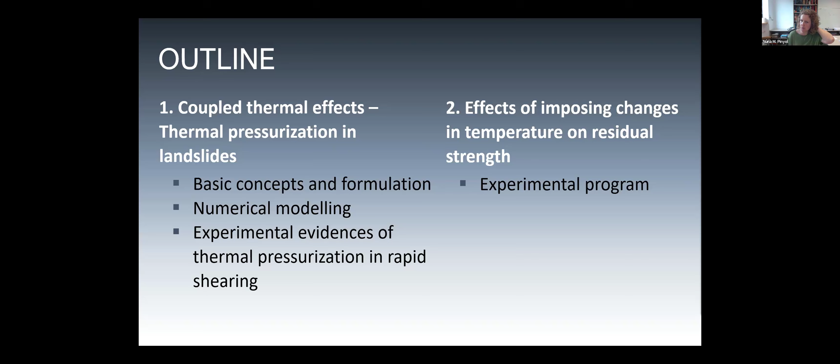Later we focus on the second part of my presentation, in which we try to analyze if we can isolate the direct effect of imposing changes in temperature on the residual strength, because at the end it is this strength that controls the evolution and the acceleration or runout of landslides. This part we explore mainly from an experimental point of view.

Then we move into the first part to understand thermal pressurization. This phenomenon was invoked to explain the catastrophic acceleration of some landslides, in particular the Vajont landslide that you know for sure, that occurred in Italy in 1963.

It is one of the most catastrophic landslide events of the 20th century, because 270 million cubic meters of rock were mobilized at speeds exceeding 25 meters per second, which is more than 100 kilometers per hour. This mass impacted the reservoir and the wave overtopped the Vajont Dam and destroyed the village located downstream in the main valley.

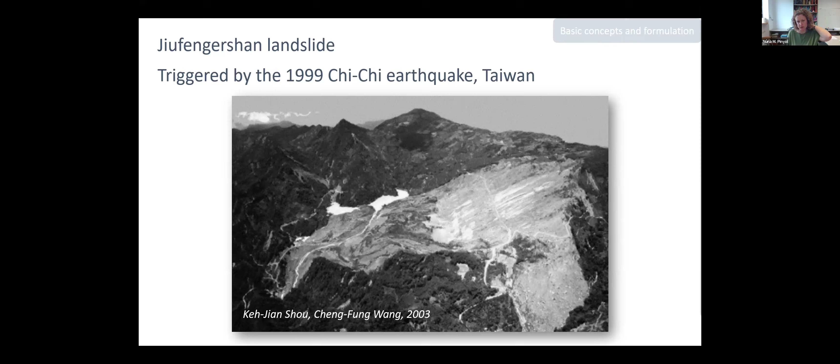The concept of thermal pressurization is also invoked to explain more recent landslides. An example is the landslide that occurred in Taiwan, triggered by the Chi-Chi earthquake in 1999. This is the Jiufengershan landslide, and its runout is explained, or justified by some authors, because of thermal interaction again. Other catastrophic landslides thought to have large runout due to this cause include the San Juan de Grijalva landslide, triggered by a drawdown in 2007 in Mexico, where thermal interaction may have also played an important role.

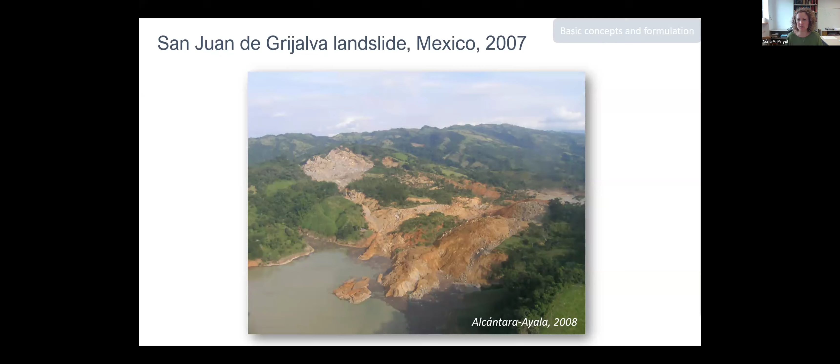The fundamental concept and physical phenomenon behind thermal pressurization is that the heat generated due to frictional work induces increments of pore water pressure, which in turn reduce the effective stress and then the available strength.

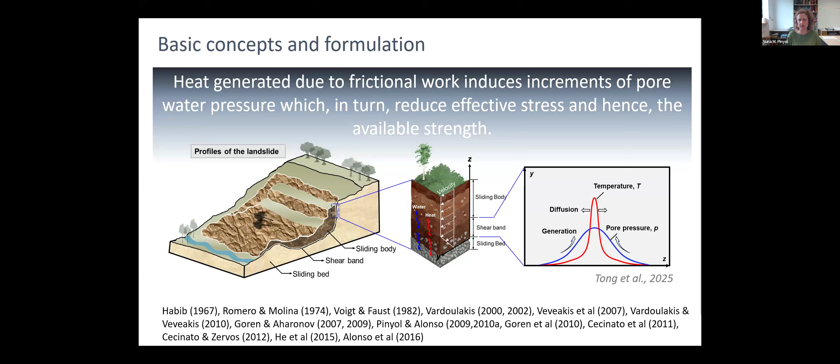These ideas have been developed by several authors since Habib in 1967 and others, and the concepts and formulations are not equal for all authors. Some hypotheses change, but the idea is always the same: that the temperature induced by this frictional work causes a loss of effective and available strength. Then the governing equation of this phenomenon that we implemented is described here.

The idea is that this frictional work is defined, which dissipates as heat at shear bands during motion. The frictional work is made equal to the heat according to the first law of thermodynamics, and this heat eventually induces an increment of temperature due to the energy balance equation. Then this temperature may induce excess pore water pressures due to the constraints of expansion and flow.

It is defined by means of the mass balance, the mass of water and solid balance. This temperature may induce pore water pressure that, depending on the constitutive equations considered, induces a loss of strength. In this first part of the analysis, the constitutive equation was modeled by means of a simple Mohr Coulomb model, without including temperature in the constitutive behavior of the material. But this effect of the pore water pressure may induce changes in the mechanical response of the soil.

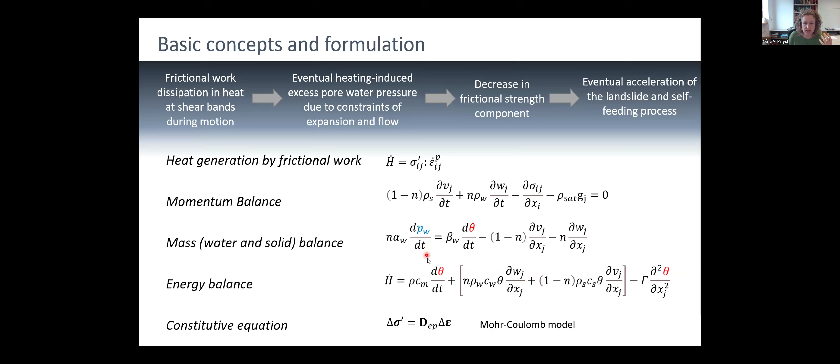All of these equations were implemented in a general numerical tool to solve boundary value problems, and we selected the material point method, which is suitable for simulating large displacement by combining Lagrangian and Eulerian discretization. The idea is that the materials are discretized into material points that carry all the information and can move throughout the domain, which is discretized with a computational mesh used to solve the equations. The results are finally mapped to the material points that update their position without involving distortion of the computational mesh.

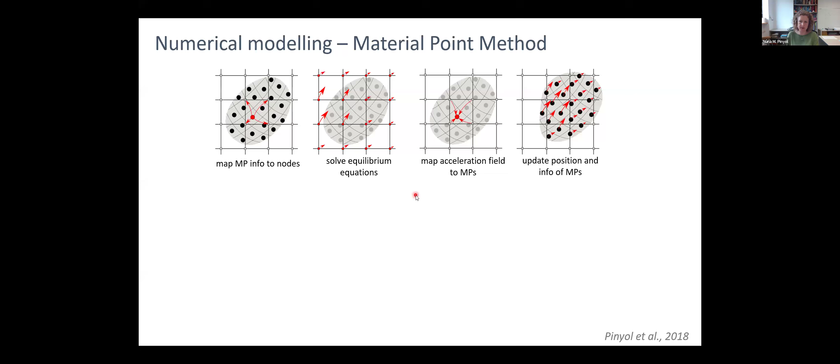With this, we could include all the equations, but what we observe is that direct implementation of the equations to the material point method leads to a pathological mesh dependence, because the rate of generated mechanical work per unit of volume depends on the shear band thickness. The thickness of the shear bands when modeling with a continuum method such as standard MPM, but also standard finite element method, depends on the mesh size.

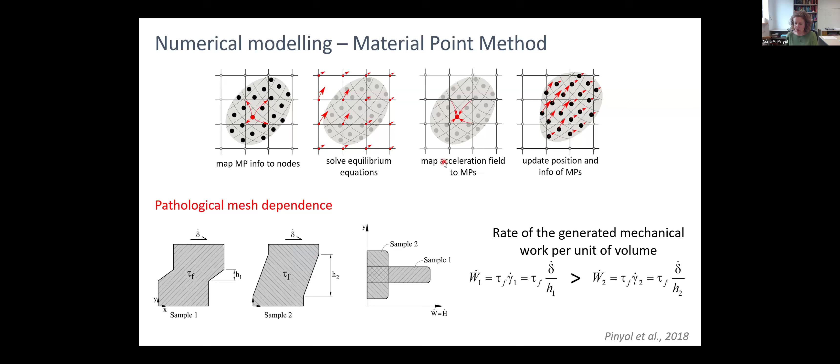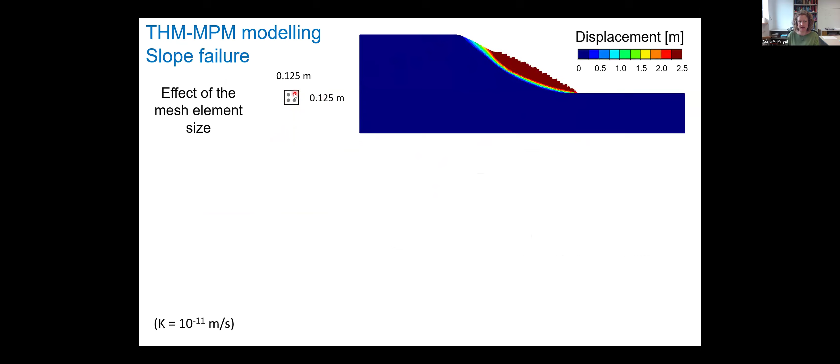What we observe is that the results, for example in this simple geometry, in terms of run-out maximum displacement, depend completely on the mesh element size. If we increase this element size, the displacement reduces significantly because the accumulated pore water pressure due to a given displacement was lower when the element size was larger.

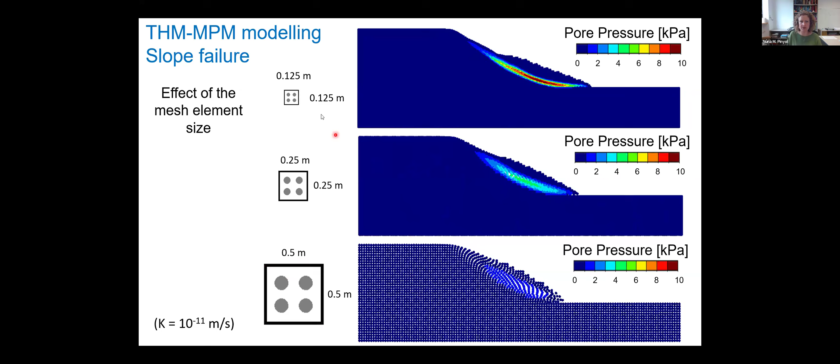As you can see here, the velocity starts, the slope becomes unstable, but given a displacement, the pore water pressure accumulated is larger, even having the same properties of the material, because the only difference is the element size.

In order to overcome such limitations, we developed a numerical solution which consisted in defining numerical embedded joints. The idea is calculating the work dissipated as heat by means of the deformation associated with a material point, but localized into a shear band whose thickness is defined by the user, and it doesn't depend on the mesh discretization.

Note that this procedure is not equivalent to non-local regularization that is typically applied in finite element method, because in this case the thickness of the embedded shear bands is smaller than the element size.

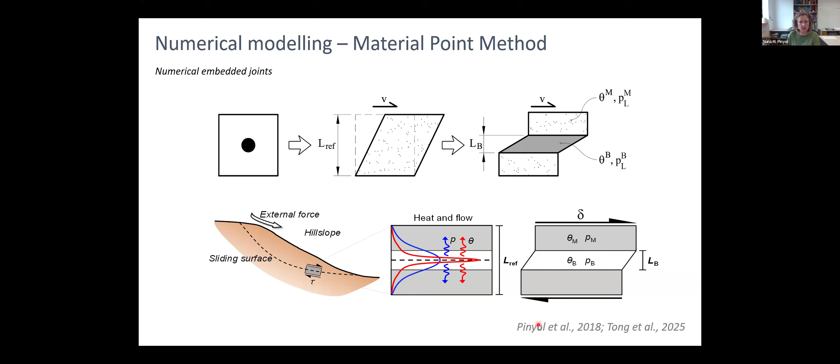Once that is defined, we define a local equilibrium to solve the dissipation of pore water pressure and temperature generated in these numerical embedded joints. Once this local equilibrium was defined, the rest of the equilibrium with the rest of the mesh is applied as usual, or as the standard methods do.

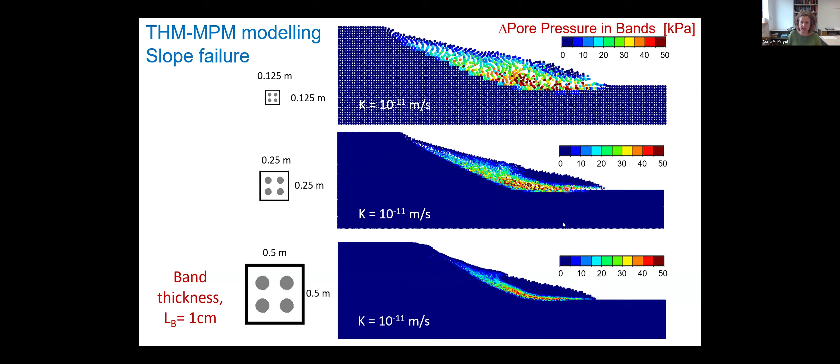With that, you can see that the incorporation of the embedded joints prevents the pathological mesh dependence of the heat generation. We observe a similar, though not pathological, effect of the mesh, and the excess pore water pressure measured is almost the same, as well as the final displacement and the final geometry calculated.

Then with that, we wanted to evaluate what are the important parameters actually controlling the response of thermal pressurization in accelerated landslides.

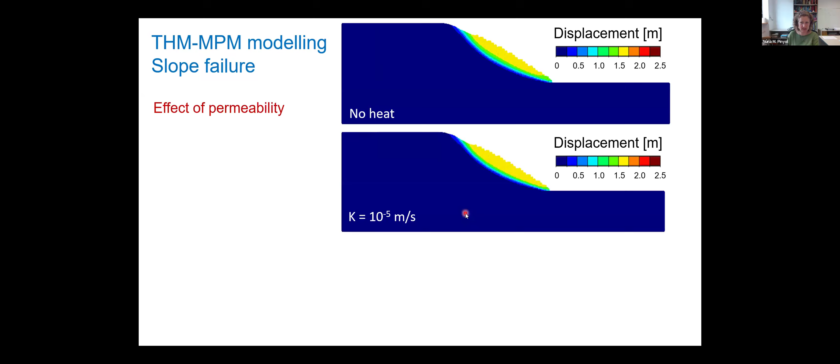We observed that the most relevant parameter is permeability, because if the slope material is relatively pervious, with a permeability equal to 10 to minus 5 meters per second, the results are similar to the ones obtained without thermal coupling, without the thermal interaction.

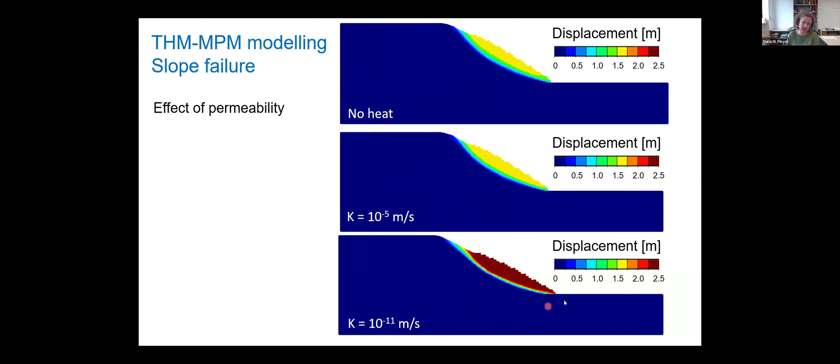On the contrary, if the permeability is significantly lower, around 10 to minus 11, the effect is relevant. This low permeability prevents the dissipation of the thermally induced pore water pressure, and it leads to acceleration and larger displacement of the landslide.

Here you can see how this low permeability prevents the dissipation of this excess pore water pressure, and it is not the case when the material is more pervious.

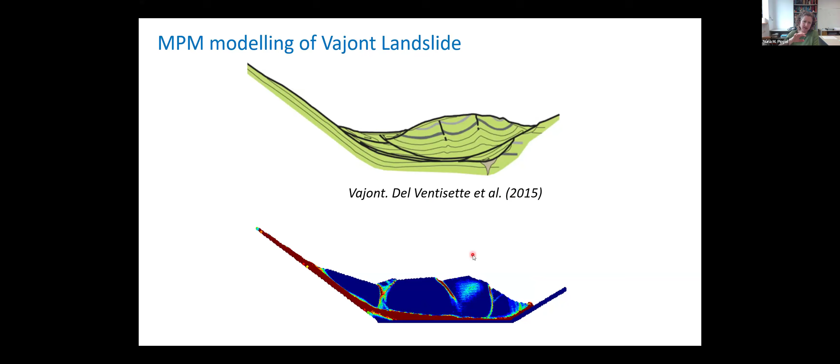With that, we could model the Vajont landslide for the first time without simplifying the geometry, using a general numerical tool, which is useful because you can define a more realistic geometry and also introduce the effect of the strength of the mobilized material during the motion.

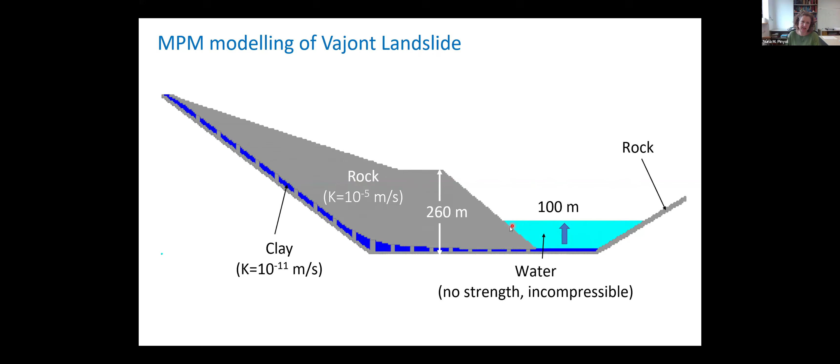We also include the water, and we simulate, not in actual time, the reservoir impoundment and how the landslide moved.

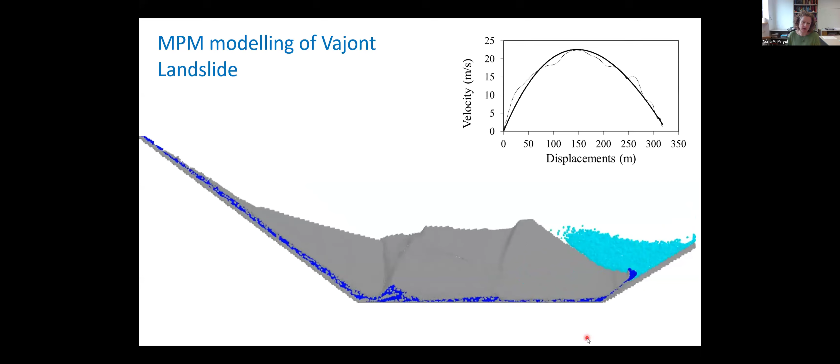Here you can see the video of this motion and acceleration, and here the shear bands defined. The results show that the landslide speeds at more than 20 meters per second and runs more than 300 meters until reaching the opposite flank, which is more or less what is estimated according to the height of the waves generated.

What we observe is that if we consider the description of the materials and characterization according to the literature, we could reproduce the sliding, but not the runout, because the displacement calculated was underestimated significantly compared to the final runout, which was more than 1 kilometer. This is the final geometry, shown in blue, of the landslide.

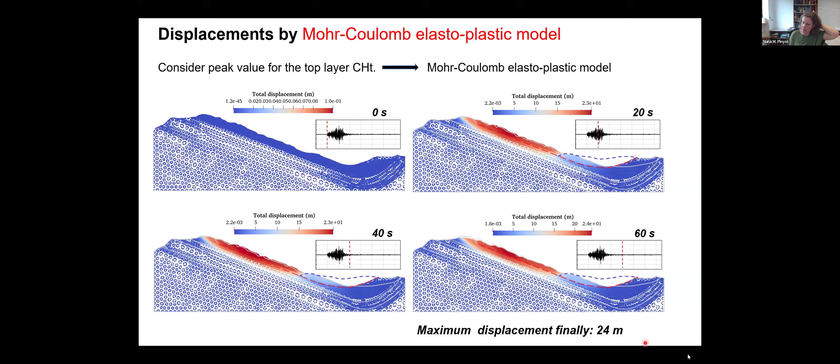Then we introduced a description of the materials with strain softening, according to the results of laboratory tests carried out on the material involved in the sliding surface. The effect is significant and the runout increases, however it remains smaller than the observed one.

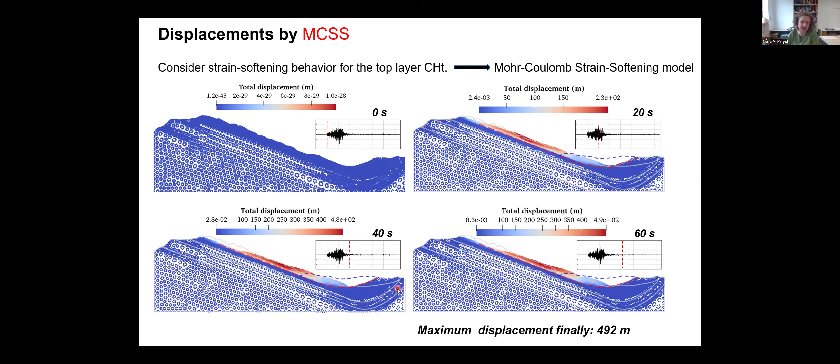Then we explored if the thermal effect could explain this large landslide. This is without thermal effects, only including the strain softening. As you can see, it is moving and the runout is larger, but it finally stopped.

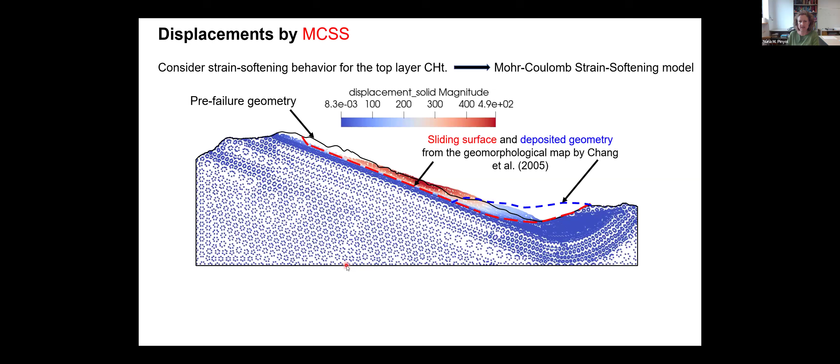When the thermal effects are included, we observe that we can model the runout, and the final geometry is more or less similar to the observed one.

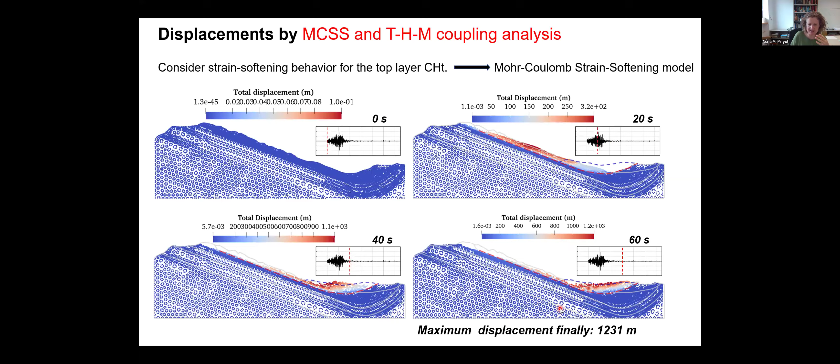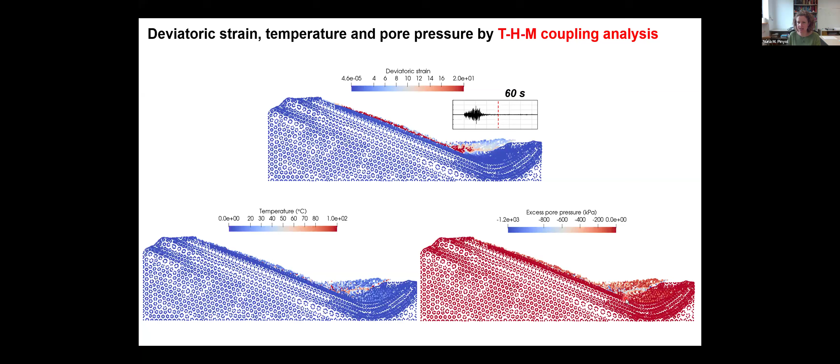This is the video of the results in the MPM, including the thermal effects and the embedded shear bands.

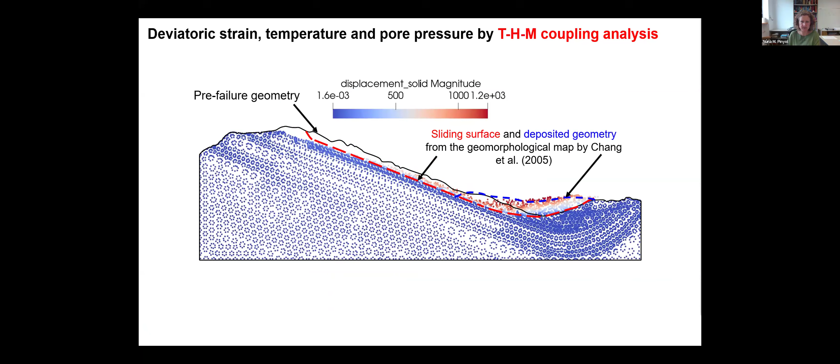At that point, we wondered, or we wanted to explore the observation—we are interested in experimental evidence regarding thermal pressurization due to shearing, because in the literature this data was very limited.

Some years ago in the laboratory at UPC, a rapid ring shear test was designed and built. This test is a ring shear test able to control and measure temperature and pore water pressure, with velocities applied in the range of 0.1 kilometers per hour to 20 kilometers per hour.

The idea was to apply a vertical stress and control the vertical displacements, measuring the pore water pressure and the temperature developed in the sample during shearing at very large velocities.

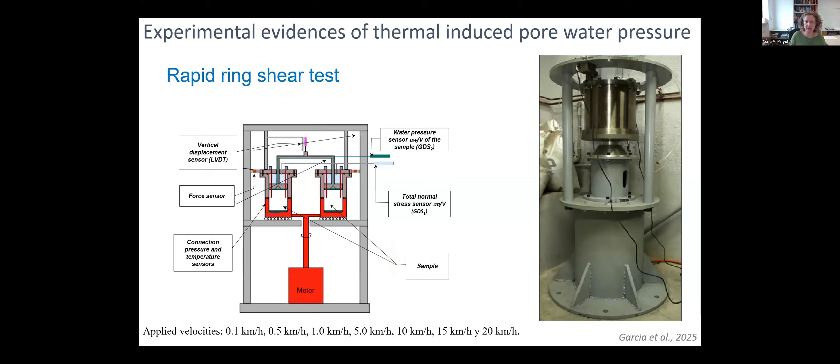Here I present some recent results very quickly. Samples of low plasticity clay were taken from an incipient landslide located on the flank of a reservoir in Catalonia, and we're analyzing these landslides because we want to assess or evaluate the potential acceleration of these landslides.

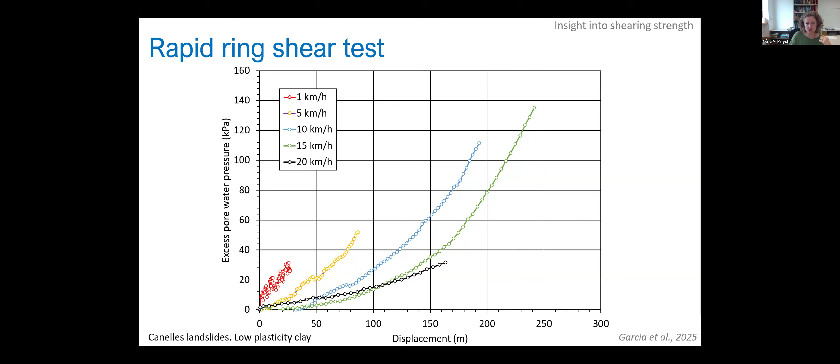This material was tested in the rapid ring shear test. We observed that during the test, as displacements accumulated at different velocities, the temperature increased significantly, and this involved an increment of pore water pressure inside the sample, which obviously controls the effective stress and the strength.

At this point, we wondered if the temperature generated by the frictional work, or maybe imposed from outside, could affect the residual strength, and also if we need a very large increment of temperature, or only a few degrees, to have an effect on this residual strength parameter that controls the displacements and evolution of landslides.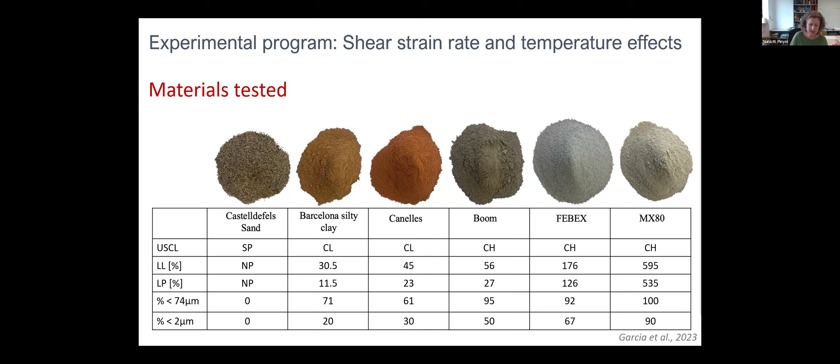We added some additional mixture samples, constituted by the Castelldefels sand and the Febex clay and the MX80 clay, which are these high plasticity clays.

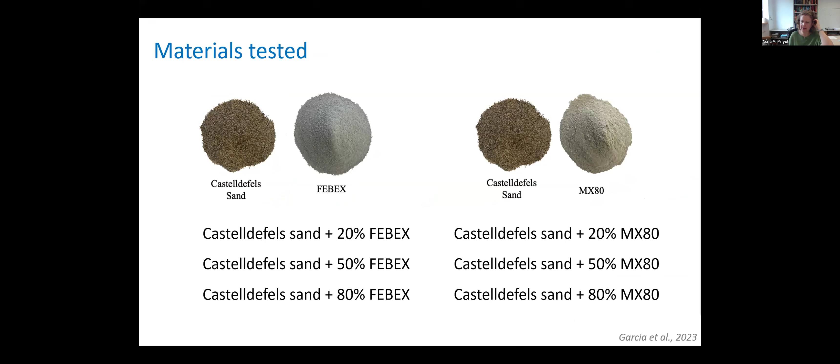We modified the Bromhead ring shear equipment in order to control the temperature, which was controlled by cooling and heating the water surrounding the cell where the sample was located.

The idea is that water circulates from this deposit and the temperature is imposed and controlled. We ensure the temperature of the system and the equipment, and that the temperature in the sample was evaluated.

The protocol of the test is shown here. We perform heating and cooling tests. Some tests were started at laboratory temperature, and some were previously cooled or heated, then we apply the change of temperature during shearing.

We ensured that transient effects were not evaluated, in the sense that we changed the temperature while shearing continued, and later on we evaluate the strength in order to assess not the transient effect of the temperature change, but the strength at this new temperature.

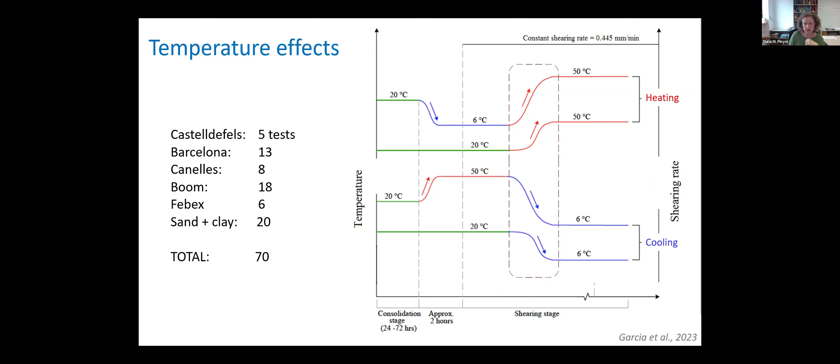In total, we performed 70 tests on the different samples described. Here I show you some results. This is the temperature applied, shown in green, and the results are shown in red.

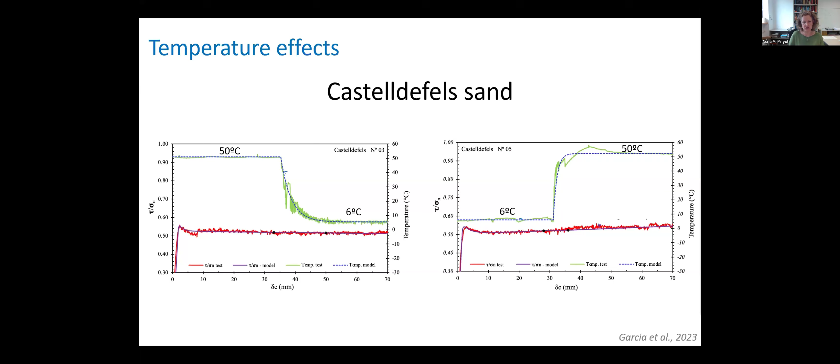In case of the Castelldefels sand, this fine sand, we didn't observe any reaction, any effect. In the low plasticity Barcelona silty clay, the effect was not evident. But this effect increased with the plasticity, with the content of clay and with the plasticity of the clay. You can see this effect in the Canelles clay.

This is the material of the landslide that I showed you previously. You can see that when the temperature of the sample decreases, the strength increases. This effect is symmetric, in the sense that when the temperature increases by the same magnitude, the strength decreases also in the same magnitude.

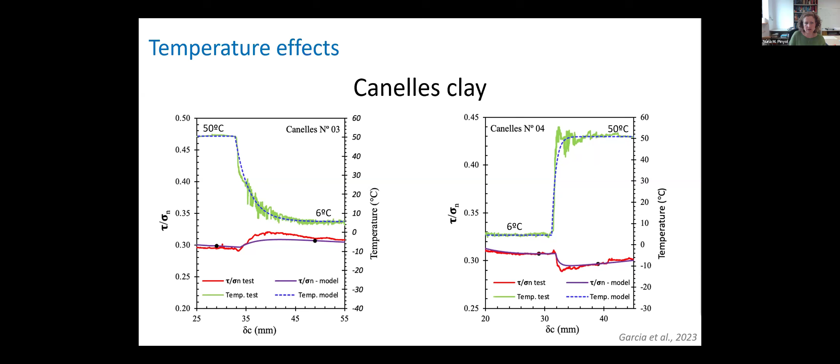It was also observed in the Boom clay and in the Febex clay. Here you can see the results in terms of variation of temperature and increase or decrease of strength, expressed as increments of friction angle.

Sometimes the results are not very clear, but the tendency we observe is that the effect clearly increases with clay content and with plasticity. In this test, the effect is not so large, but we have some problems with these samples.

Because during shearing they exhibit some expansion, we cannot interpret the results in the same way.

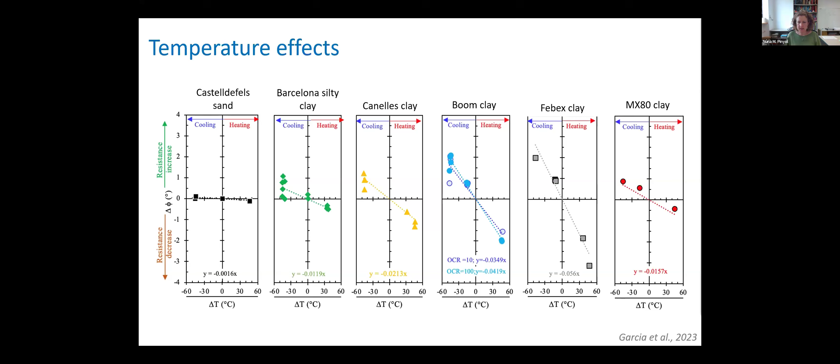Moving into the conclusions: a numerical tool has been developed to model thermal pressurization inducing acceleration on landslides, and permeability is the most relevant parameter controlling the coupled thermal effects.

We observed in rapid shear ring experiments that there are physical evidences of this excess pore water pressure generated during friction, at least at large velocities.

In parallel, a consistent experimental program to evaluate the effect of imposing temperature externally, not due to frictional heating, on the residual strength has been presented. What we observe is that increasing temperature leads to a decrease in residual friction, and this effect is progressively more pronounced when soil plasticity increases. The temperature effect, whether intrinsic, direct, or due to the interaction with water pressurization, goes in the same direction, namely increasing the risk of landslide acceleration.

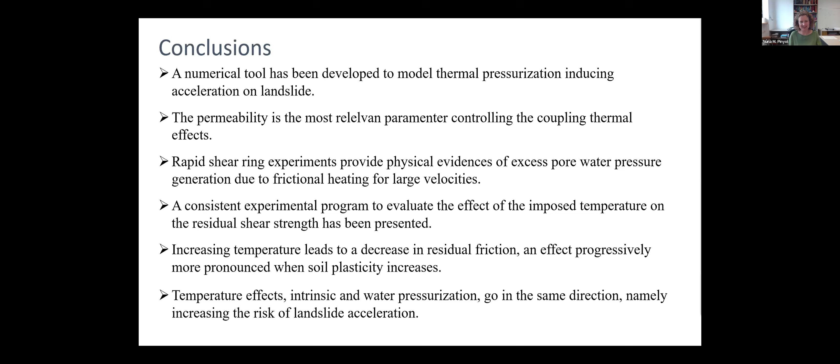This is the final part of my presentation. I would like to thank you for your attention, and also thank my colleagues that collaborated in this work that I presented. Thank you very much.

Thank you, Núria, for that excellent presentation. It was very clear to me, because I relate more to this topic than anyone else in this room, I think. Is there any questions from the audience? If not, I can start with a few myself.

If I may, you started with the material point formulation. I tried a few times during my master thesis to use this framework. So briefly, could you simplify for the rest of the group what is the rule of thumb on using, like, how many points would you need in a grid? Or is there a rule of thumb to use it? How do you start, essentially?

This is like finite element method. You know that when you have a small sample, you use small elements, and when you have a large model, these elements are very large. And at the end, the equations are solved at the nodes. Then it's better to have a very small mesh in order to have better results.

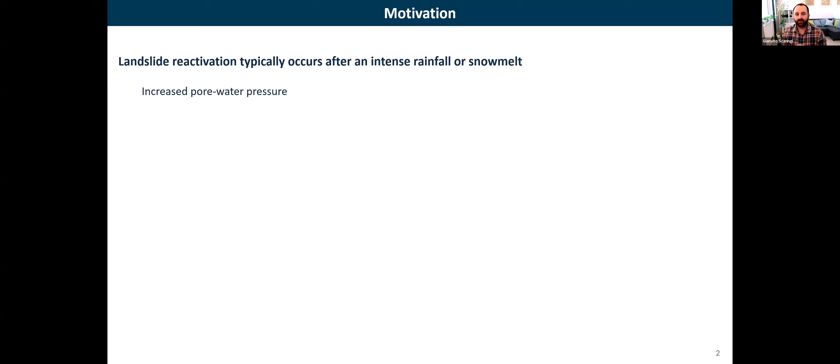And the mechanism is what we all learn in class: it is a hydromechanical coupling. There is an increase in moisture, or an increase in pore water pressure, or a decrease in suction, whatever it is. So there is a hydraulic condition that changes. You get decreased effective stress, and because of that, the available shear resistance is decreasing, and because of that you get remobilization, acceleration, and so on.

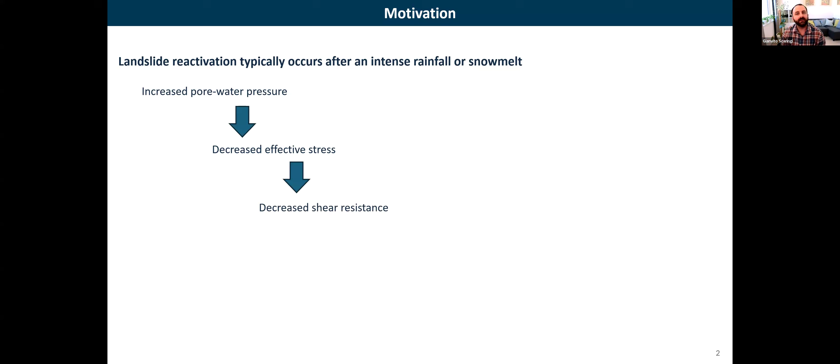But this cannot explain all landslides. Some landslide reactivations don't follow this pattern, and what inspired my research in particular was a study by Shibasaki and co-authors at DPRI Kyoto, an about 10-year-old study that took observational data from a group of landslides in Japan that were moving in quite a counterintuitive way.

So let's look at the graph, what this graph says. Here you have in red the cumulative displacement. You can see there are some phases in which you have an acceleration of the landslide, and then it stops again, it slows down again. And then in the next year there is an acceleration, and so on.

And these accelerations are happening at the end of the year — September, October, November, December — and then they stop. Here you have the rate, the daily displacement, and they're not small; daily displacements are in the order of meters. So it's a landslide that really accelerates, moves some meters in autumn, and then stops again.

But then if you look at the precipitation, the summer is rather drier, then the landslide starts before a wet period actually begins. The moist times are actually at the end of autumn and into winter, when you have more precipitation. And winter is actually snowfall, quite a lot of it, since you get up to 3 meters of snow cover in this area.

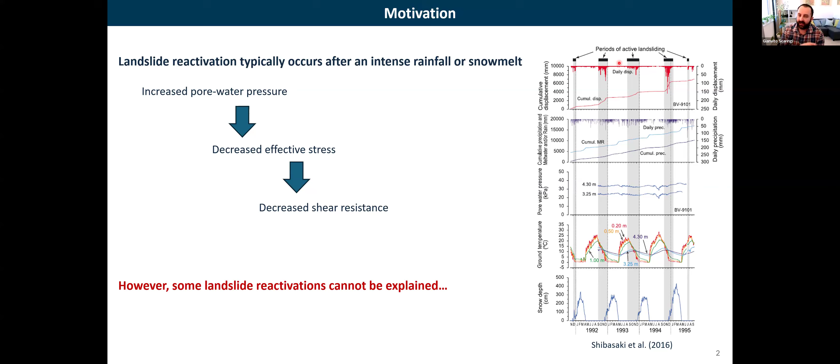So the authors hypothesize that this is a thermal effect in this slow-moving landslide, explaining its acceleration. To me it was a really fascinating topic that prompted me to study more coupled processes in soil—thermo-hydromechanical, chemomechanical, like Tom said.

Then the authors wanted to investigate further. They had quite a good apparatus, the Sassa machine, a big ring shear. We also control pore water pressure, though that wasn't used in these specific experiments. What they did is look at how the residual shear strength changes with temperature.

They find something a little different from what Núria showed you, because in their case the effect of temperature is consistent, concordant—my student tells me to say—with the temperature: temperature increases, the shear strength increases.

This material, as you can see, is not the landslide material actually—it's one type of bentonite, which from the friction angle is really some very pure smectite, because of the really low values and probably very smooth surface.

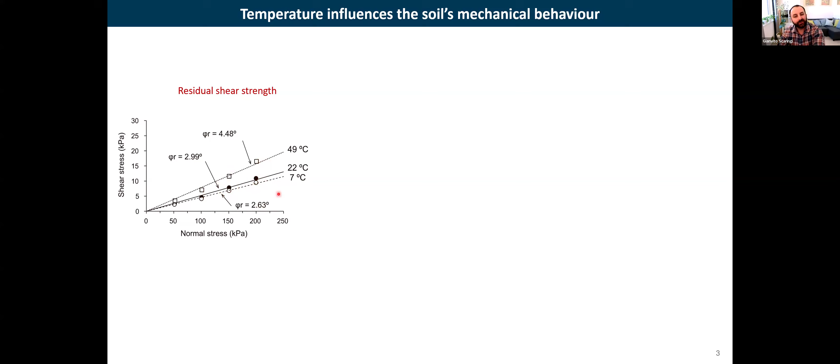What is interesting here is that they observe an increase in strength with an increase in temperature, and vice versa—weakening upon cooling. The black points here are room temperature. At lower temperature there's somehow 0.3 degrees, which is actually quite a bit—it's 10% less strength, which can explain when the landslide is moving.

The authors took this to the next level. I think what we are trying to do is reproduce these results, but their data set is already quite rich and quite interesting.

They figured that it is the smectite fraction in the clay soil—not the kaolinite—but the percentage of smectite that can be somehow correlated with the thermal effect. They did this also with plasticity, and it still works.

As you can see, now the axes are reversed. They were interested in weakening by cooling, so the points go down here representing weakening by cooling, and the white points instead represent weakening by heating. But the effect is the same: cooling means weakening, heating means strengthening. They verified this in both directions. The more smectite you add, the stronger this thermal effect.

This is a normalized measure—you should read it as how many percent of residual shear strength changes, or actually this is the friction coefficient, but more or less we are there. Friction coefficient or friction angle shows quite a linearity at low levels. So this -1 means 1% change in friction angle per 1 degree of cooling.

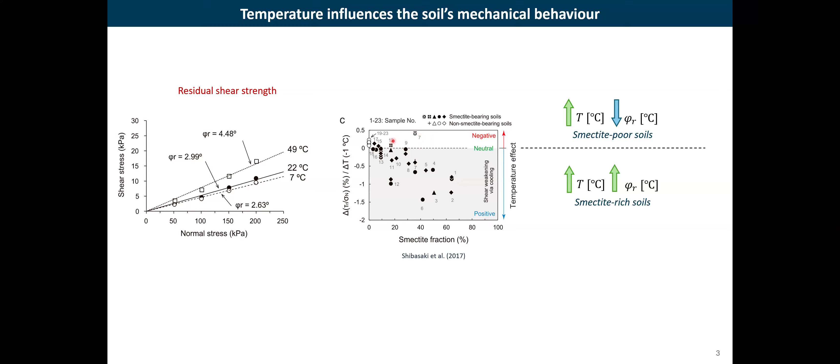So this is a variable in the laboratory that we need to consider, and also we need to consider how we extend our results to the field. What is the upscaling variable? Is it the displacement rate on a surface? Is it the strain rate within a shear band? It's quite important, because it can change how we model.

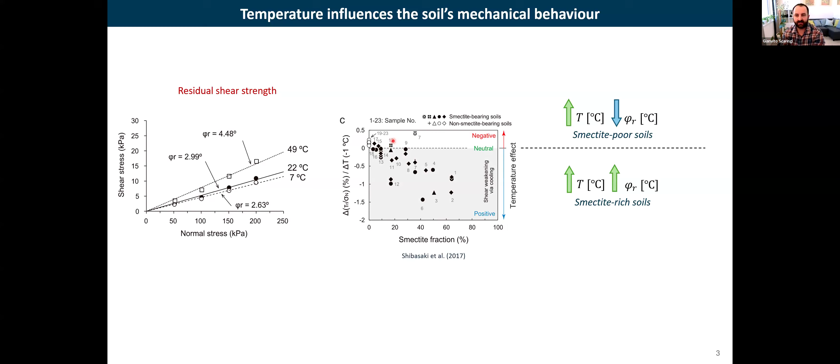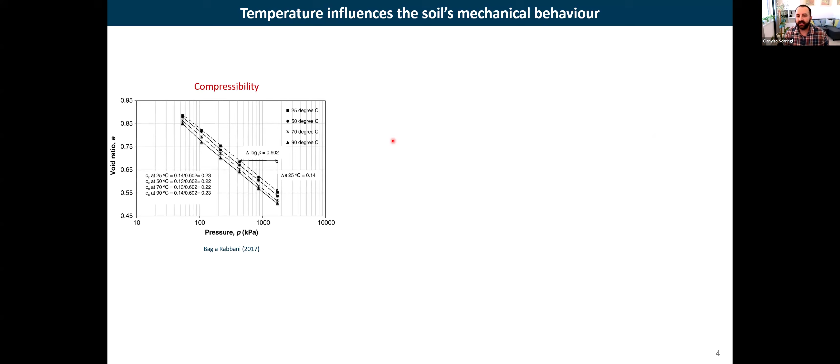What I want to add is that while Shibasaki's results are probably the first that really investigate the residual shear strength, there is other literature investigating other parameters of soil behavior and how temperature influences them. You can see in recent literature for energy geostructures or nuclear waste repositories an interest in understanding thermohydromechanical coupling with respect to compression behavior, hydraulic conductivity, and development of swelling pressure. This is done both in saturated material and in compacted beds. So there is now quite a rich literature.

And then the question is, well, is the problem then solved? Now we know behaviors, we have rich experimental data sets. What for do we do the research? Well, the problem is not solved in my opinion, because we engineers still work with classical soil mechanics, in which, in general, temperature is not considered.

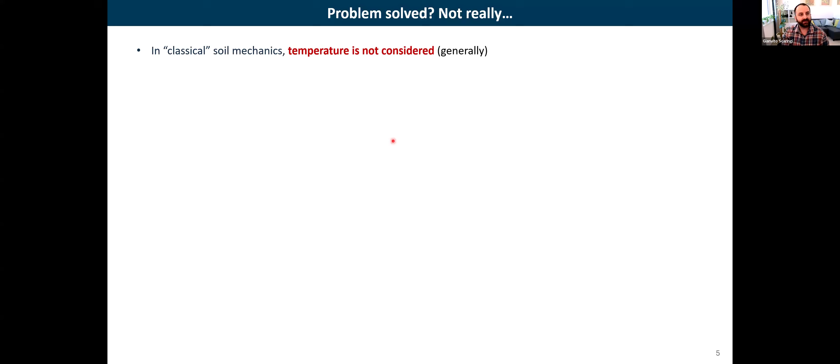Especially in slope stability, except Núria's work and a few more works on fast landslides, or work that considers freezing and thawing, in more extreme conditions, then yes, there is control of temperature. Otherwise, everything is done at room temperature in the laboratory.

Actually, there is really no control. It's like, oh, there is air conditioning in the room, more or less 20-25 degrees. But in some laboratories, temperature can also oscillate. And instead, in the field, the soil is always at a different temperature, certainly not 20 degrees.

In our climate here in the Czech Republic, the underground stays at 7 to 15 degrees, especially after some meters of depth. Temperature is more or less constant, it doesn't change much. In colder climates, you have 3-4 degrees. In tropical soil, the ground is warmer, but it's still different from the lab.

One first thing I notice is that we don't account in classic soil mechanics for the temperature difference between lab and field, which can actually alter all possible soil mechanical properties. By a little, by a lot, I don't know, but we need to quantify it.

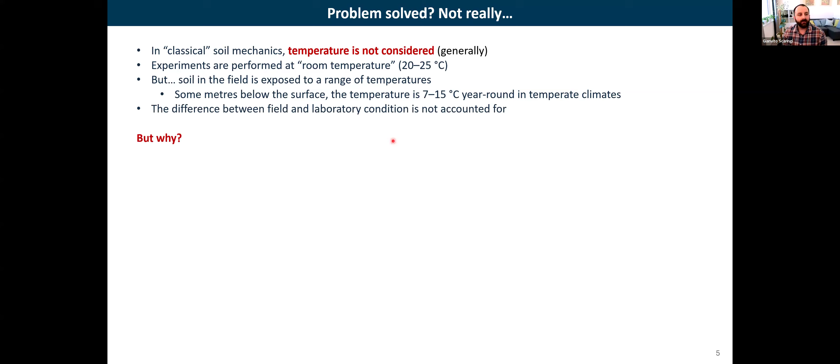And the problem is that overall, the effect of temperature is relatively less studied, so we can get inconclusive results because we don't have standardized protocols to do things. Depending on methodologies, apparatuses, testing conditions, over-consolidation, we can get different results. And so the thermal effect did not systematically go into norms or handbooks.

And also, there is another problem. While rainfall-induced landslides or earthquake-induced landslides are something really self-evident—there is an earthquake, there are thousands of landslides—it's still not so evident that you see, oh, there is global warming or a heat wave, and you have more landslides, because it's hidden. It's coupled, it's complex, there are many other variables.

So temperature-dependent phenomena, you see them only in some extreme cases: rapid snow melting at Svalbard, or very fast mega landslides, where you really see frictional heating, thermal pressurization, and so on. But this doesn't mean the effects don't exist in all other landslides. It's simply that they can be hidden, they can be coupled, and maybe they simply have not been studied enough.

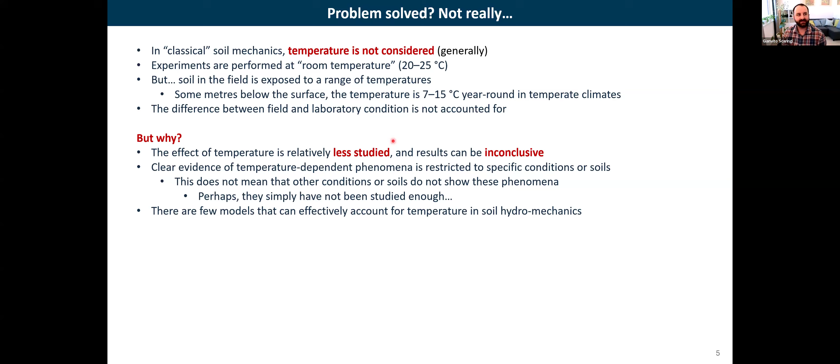In general, there are fewer models compared to general soil mechanical approaches that account for temperature in soil mechanics. MPM with thermohydromechanical coupling by Núria and others is one of the not so many examples of such approaches. Núria is pioneering this field—it's not well established in this sense. There are experiments, there are experiences, but not too many.

And if you look, I like to look at history also.

People arguing for the importance of coupled processes or thermal effects were not many, but there are some very notable examples. One of the pioneers of coupled conduction phenomena was Professor Jim Mitchell.

Already in the 60s he wrote a collection, a report for the US Highway Research Board on temperature effects on the engineering properties and behavior of soil. This is a beautiful collection, a technical report with 14 papers published in 1969.

Commissioned by the Highway Research Board, the problem was they were building interstate highways in the US, in California. He was in Berkeley, with Arizona and Nevada having great thermal excursions. These embankments get damaged, so the Highway Research Board asked Professor Mitchell whether temperature is a problem in road embankments, and how they could study it. He made a nice and comprehensive collection.

He writes in the introduction that it makes possible a greatly improved understanding of the importance of thermal influences in soil mechanics, and in some applications he also wanted to explore thermal treatment of soil.

Little parenthesis: 1968-69 were the years NASA was bringing astronauts to the moon, a time of pioneers. Professor Mitchell was also involved as a consultant by NASA, not for thermal processes, but to understand the possibility of landing on the moon and sampling lunar regoliths.

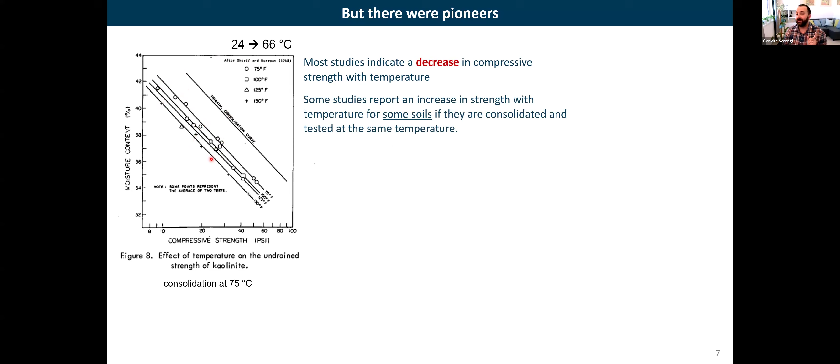The author argued that in general compressive strength decreases with temperature, but this relates to kaolinite, not to montmorillonite. This other one, Noble and Demirel, in this collection, is really beautiful.

It's so systematic because this is the effect of consolidation temperature and shearing temperature on the peak strength of an alluvial clay. It tells you that if you consolidate at a high temperature, you get better compaction, better engrainment, lower porosity, and then when you shear it, the peak strength is higher.

But it also depends on the temperature at which you are shearing. If you shear a cold clay, it's more brittle and gives you a higher strength. If you shear a warmer clay, it's already softened - it loses this pre-consolidation effect of the high temperature compaction.

This had practical implications in the construction of road embankments. They were basically telling you that when you build the embankment and compact it, do it in the summer, so it's better compacted. And here is how it can fail at peak strength, whether it's summer or winter, because the embankment can get very hot under the asphalt.

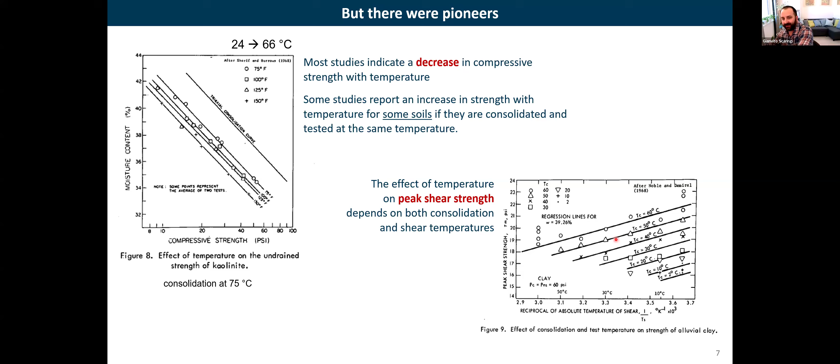These are quite nice preliminary results, but after that there was not really too much research about it, and it's a bit of a pity. So now, back from the history of 68-69 to our research, I want to show you what we did instead, to try to confirm and validate the findings from the literature.

We are in the Czech Republic investigating a number of slow-moving landslides. These are just 3 examples in one marine clay formation, the Březno formation, where you have materials of medium activity - around 70% liquid limit, 40 plasticity, 30 to 40% clay, sometimes a 50% clay fraction, and sometimes liquid limits are even higher.

Friction angles are around 10 degrees, 8 to 10 degrees residual friction angles. They are moving millimeters per year, with some fast reactivation phases in the past, over slopes that are quite gentle. This is not uncommon - it happens in the Czech Republic and a lot in Italy on the Apennines. We have many slow-moving landslides on these clay slopes.

What we did to test this - well, here we did not have evidence in the field like Shibasaki had it.

We don't have yet enough monitoring information to say whether this landslide is actually physically moving with the temperature changing. But we want to know in advance, before data come to us from inclinometer and so on, whether there can be a potential effect.

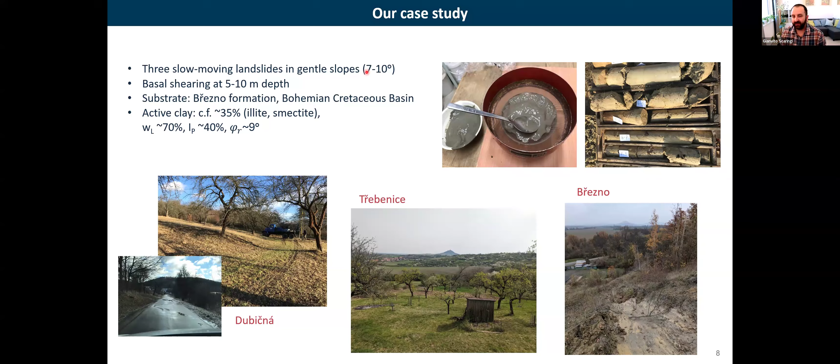We developed a very similar apparatus to that in Barcelona. It's a Bromhead apparatus with control of temperature with an external water bath, thermometers that monitor the temperature in the water, and a system, a protocol to increase or decrease the temperature and observe the shear strength. This is work developed by Marco Loche first, and then by Dakal, our host today.

I will just show you now a little bit of what we did. In general, we went with temperatures higher than room temperature. It was easier for us, but we also did some experiments at lower temperature, like 7 to 10 degrees Celsius.

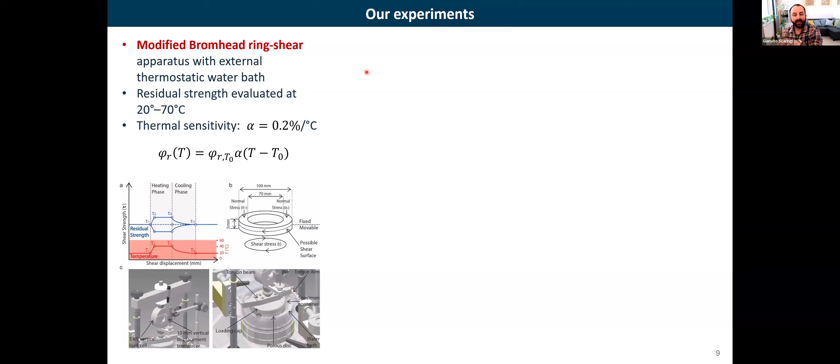And we evaluate thermal sensitivity in our material on this order of magnitude, so 0.2% per degree, but positive in the sense that we observe a strengthening upon heating or weakening upon cooling, which is consistent with the observations of Shibasaki. Interestingly, this effect persists in a range of shear rates.

So we go here at 18 microns per minute. This is 0.1 millimeters per minute, 0.2. Although when we get into faster rates, so 1 millimeter per minute and up, the effects start to fade away, start to disappear. But like we discussed before, it gets complicated.

Material starts to be extruded outside the pore water pressure. We don't know what is happening about pore water pressure because we are not measuring them, at least not yet. We are trying to develop something to measure, to try to measure pore water pressure.

So we don't really trust the results at 1 millimeter per minute or above, and we consider instead the results that we obtain at very low rate. As you can see also, thermal effects are really not evident. There is too much noise at low confining stresses, but when you go at 150 kilopascal, you start to see some evidence.

We try to explore two protocols. This is a protocol in which the experiments are completely distinct. So we do one sample and we test it at room temperature. Another sample, we test it at elevated temperature throughout the experiment. So like if the sample exists at 70 degrees only.

Of course, it makes more issues because you need to prove that it's repeatable. You need to make many experiments at each temperature and do some stochastic analysis, statistical analysis to be sure. So these are just two trials. And you see that there is some thermal effect, and it's in the order actually here of 0.1% per degree, not too big.

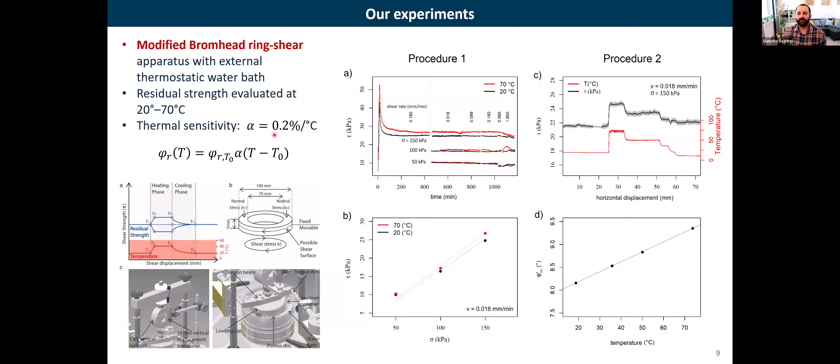So the experiment lasted for long, and I quite trust that there are no residual excess pore water pressure. We get into a drained behavior, and we can get some linear correlation between friction angle and temperature, which gives us, in this case, about 0.3. We don't know which method is better actually, so for now we say that our landslide soil has a sensitivity of more or less 0.2% per degree when it is slow sheared.

I want to show you some older results that we got on more pure clays rather than the landslide material, because landslide material is anyway a mixture. We know that there is some smectite, but there is also some kaolinite, some illite. It's really like a mess. It's quite heterogeneous also.

But if you work with pure bentonite or kaolin, you can see a little bit better the results. So I'm showing you some older results by Marco Loche, and these are the first results, the first experiments that we carried out, 3-4 years ago, where he was testing.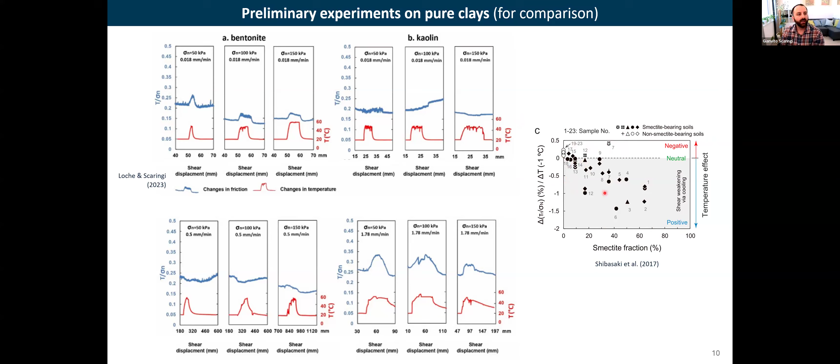I want to add also some more recent, recently published experiments by Om Dhakal, where we moved back from pure clays to natural soils, choosing soil from Nepal, which is different from our landslide soil that has smectite. This soil has no smectite, mainly quartz sands and silt, and some clay that is probably more like kaolin, less active.

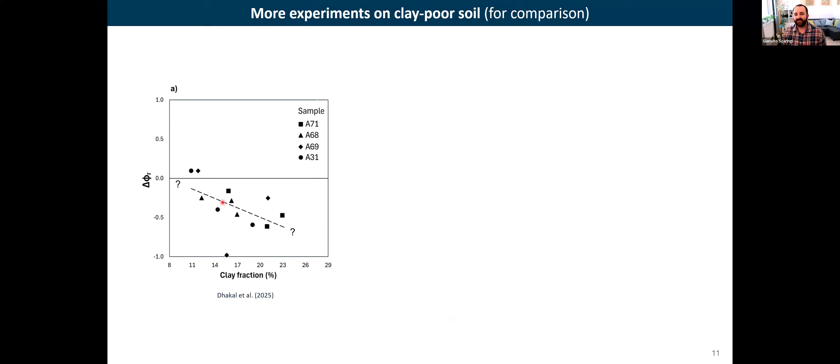It's certainly a less active clay, and it's quite interesting that these experiments by Om show instead a discordant effect: the strength is decreasing with temperature, and the amount of decrease is proportional to the clay fraction. So if you have no clay, there's no thermal effect; if you add clay, you have a negative effect. These experiments were done at 0.1 millimeters per minute.

But we have low amounts of clay fraction here, so there is some noise and scatter. What is important to me, to make an argument later, is that we can see the effects. The white points, the white markers, signal no effect or a statistically insignificant effect. We analyzed the data statistically, and the markers colored in red give us statistically significant differences in strength according to the different temperature, 50 versus room temperature.

So if we have at least some clay fraction, and test under 100, or better 150 kilopascals of normal stress, we are able to statistically say there is a difference in strength between a sample sheared at room temperature and one sheared at elevated temperature, independently of the amount. The amount is very small, we're looking at 0.something degrees in friction angle, but the effect is measurable. To me, this is quite important.

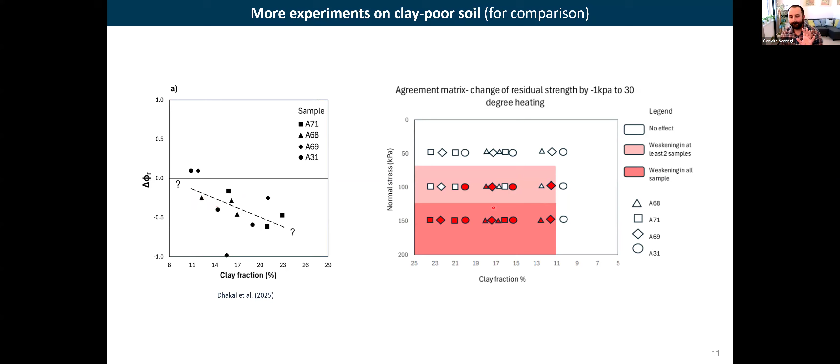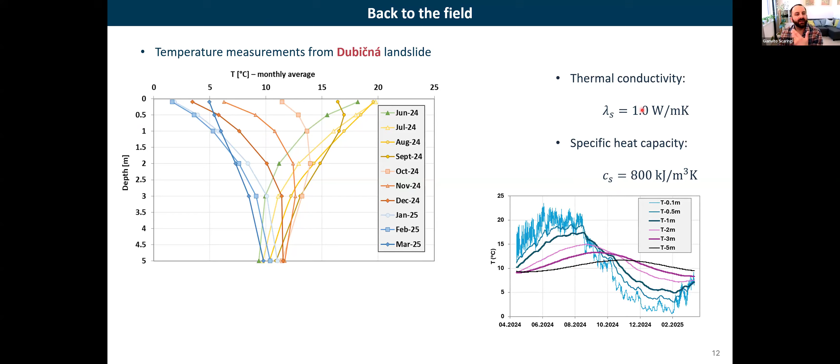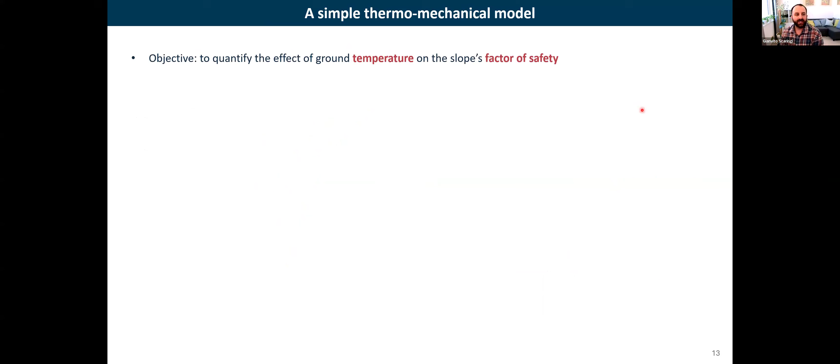We can, using thermometers in the ground, estimate thermal properties of the ground. And with this information, we can develop a simple thermomechanical model, just a model for the shear zone, to understand how the strength is changing and then quantify changes in friction angle. This was more or less mostly a parametric study that I'm showing here, based on a geometry similar to that of the landslide in the field.

We use 8 degrees, 7.6 degrees of slope. We use depths, which we parameterize. We try with 3 meters, 5 meters, 7 meters shear zone depths, which represent various landslides in the area, some shallower, some deeper. We have like a half meter shear zone, which is what seems to be from the coring. And we assign properties based on our experimental investigation, so oedometer, triaxial, and ring shear.

What is important is we apply a Mohr-Coulomb criterion for the failure of this landslide, with a temperature-dependent friction angle, linearly dependent, which is confirmed by experiments. We try with our field data of sensitivity, and we try with the extremes found in the literature relative to very, very slow shearing, done at the minimum possible rate allowed by the machine.

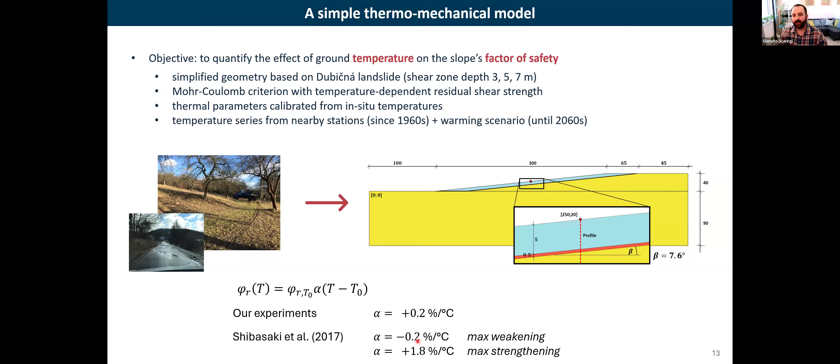And we do an extra step. We try to apply temperature data series, which we take from meteo stations that have decades of recording at the site. And we add also some warming scenarios for projecting future heating.

We build some thermal profiles in the ground, so we reproduce. The central one is the actual, current modern profile. The blue one would be like the cooler past, and the red is the warmer future based on some warming scenario. This is quite a bad scenario where the temperature at the surface is increasing by 3, 4, 5 degrees over a century, which is possible because in the Czech Republic we already had 2 degrees of warming at national level, and we expect more. It's quite higher than average.

Here you can see the seasonal oscillation. Also this plot, the envelope, shows seasonal oscillations. And if you move from one of these envelopes to the other, you get the heating after several years. We can compute using these envelopes. This one is relative to the present situation, calibrated to have a factor of safety of 1, back-analyzed so that you have 1 because the landslide is active.

We can see what we expect in terms of changes in friction and factor of safety in this simplified landslide geometry with the seasons, depending on the depth of the existing shear zone. So at a depth of 5 meters, for example, for a soil with thermal sensitivity, we get a change in factor of safety on the order of 2, 3, 4%, which adds to hydraulic effects. I don't quantify hydraulic effects here, I'm just saying that considering temperature gives you some seasonal oscillation of the factor of safety.

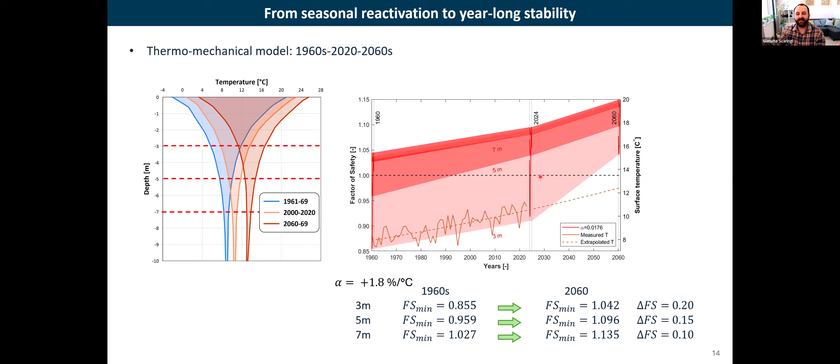Of course, I use this picture because it shows nice results, because the material I use here is very, very active. This 1.8% per degree is like really a pure montmorillonite of strengthening. If I go to more normal soil, 0.2, 0.3, 0.5% per degree of thermal sensitivity, the effect is smaller.

If I go to deeper failures, here is the oscillation at 7 meters. At 5, at 3 meters, the oscillation is 1% in friction angle, and the decrease over a century also is in the order of 1% or something. Maybe negligible, no?

Probably a second order effect compared to hydraulic triggers, that for sure. Maybe in the future there will be different patterns of precipitation, more intense or more dry in some areas, and that will certainly be the dominant effect. Here, 1%, it's small. But is it negligible for the kinematics of a landslide? I say no, in certain conditions 1% and even less can actually do a lot.

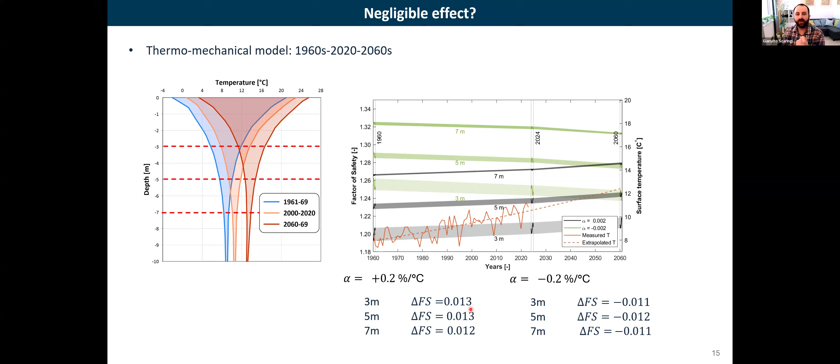If you have read, there was a study published in Nature Geoscience in 2009 by Bill Schulz and Gonghui Wang from the PRI, Schulz from USGS, that correlated the rate of a landslide, an active clay landslide, with atmospheric pressure. Even atmospheric pressure is a small, very small forcing on the landslide. It's atmospheric tide basically. It can change pressures of air in the pores, and if the mechanism does not dissipate, because it changes quite fast when there are storms and stuff, it can actually slightly pressurize or depressurize the ground.

They did some very nice and fancy calculations, and what they got in the end was the change in atmospheric pressure would change the safety factor of that landslide by 0.1%. And even this 0.1% oscillation can be correlated, if you refine it, to phases of acceleration and deceleration. These are day-night acceleration and deceleration of the landslide, which is amazing. So we actually are able to observe 1%, 0.1% effects.

The effect of a 0.1% change of some quantity, some boundary condition, can actually have a measurable effect on a landslide. So I argue that even when we find a difference of 1%, we should not just say it doesn't matter. It might matter under certain conditions, and it's worth exploring.

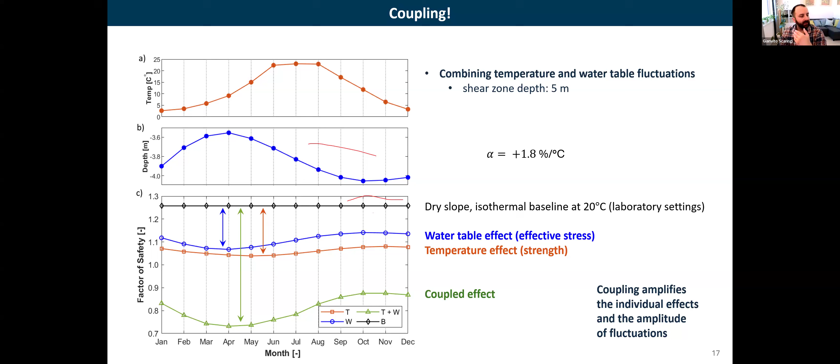And to conclude, I take it from far back, because I like the historical perspective. Soil mechanics started as a science, even not a standalone science, in the 18th century, with Coulomb. Then modern soil mechanics, and this is Terzaghi, a giant of soil mechanics, so I drew him very big in the slide, and we moved to hydromechanics systematically in the 20th century.

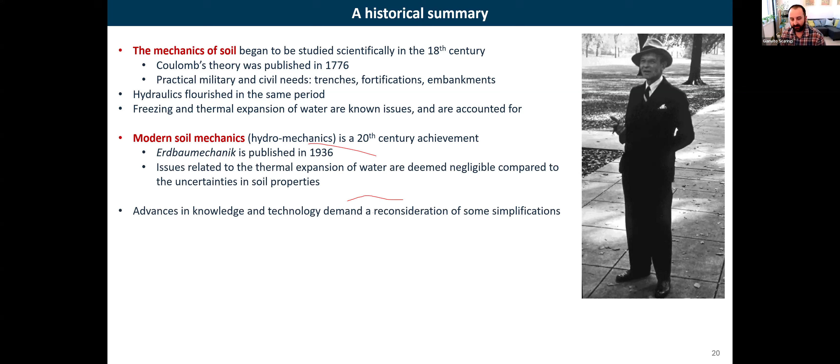Thermal problems are typically deemed negligible, but now, in contemporary 21st century soil mechanics, we have more knowledge and more technology, and I think we need to reconsider some of the simplifications in our classic thinking. We do have challenges and uncertainties, because the more we investigate, the more issues we find. But in general we are able to better constrain certain processes and have fewer uncertainties, so effects once considered negligible are not anymore.

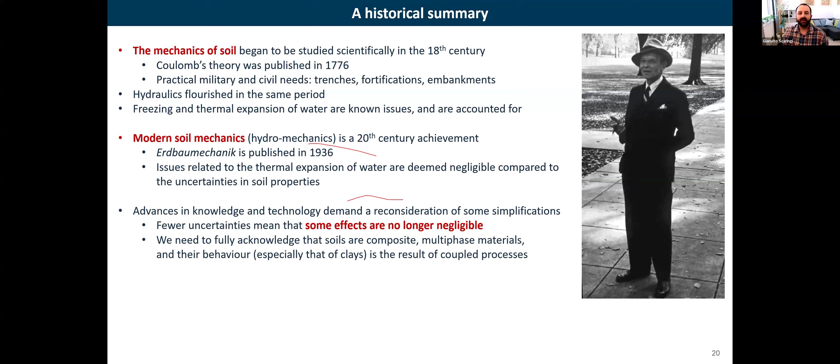So we need to acknowledge the complexity of soil, but at the same time embrace this complexity and not be afraid to work with coupled processes and coupled models. And that's it for me. Thank you very much for your attention up to this point, and I'm available for questions.